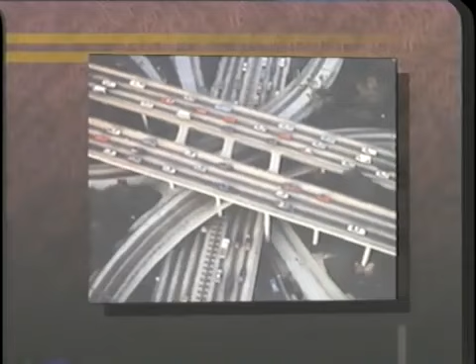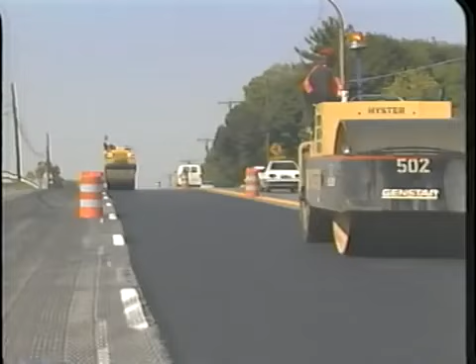For nearly a century, highway agencies and paving contractors have been constructing roads of hot mix asphalt, and with good reason. Asphalt pavements are smooth riding and long-lasting. Today, there's a new set of tools and techniques called the Superpave system that allows us to design even more durable asphalt pavements. Superpave, which stands for Superior Performing Asphalt Pavements, is the mix design system for the

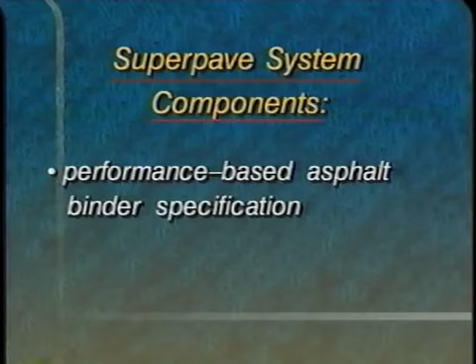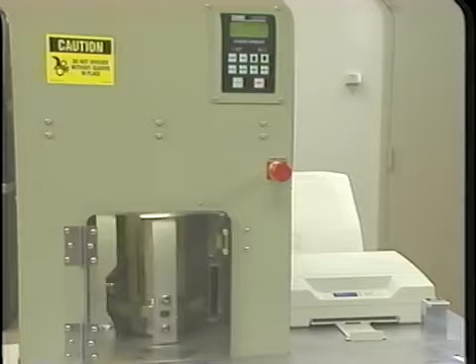next century. The Superpave system has two key components: performance-based asphalt binder specification and volumetric mix design and analysis. It also uses an improved method of laboratory compaction that reflects field conditions. Pavements take quite a beating. Not only are they subject to ever-increasing traffic loads and volumes, but they also must serve in a wide range

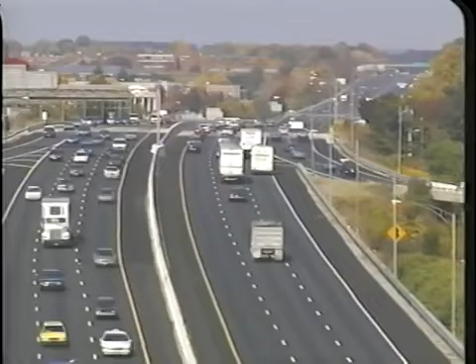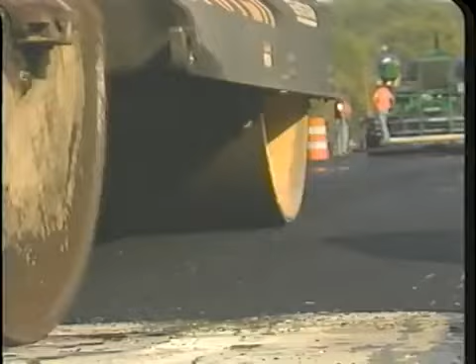of conditions. The Superpave system incorporates a new binder specification that classifies asphalt binders into performance grades based on a range of climates and pavement temperatures. The specification sets certain physical properties that all binders must meet, but the temperature at which those properties must be attained is determined by the specific climatic conditions at the paving location.

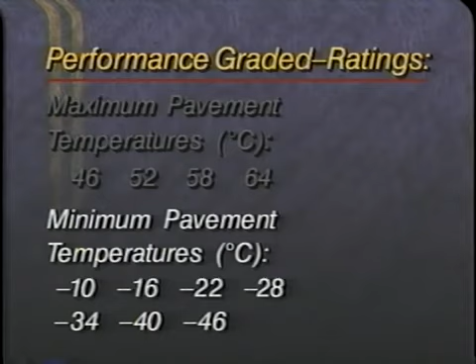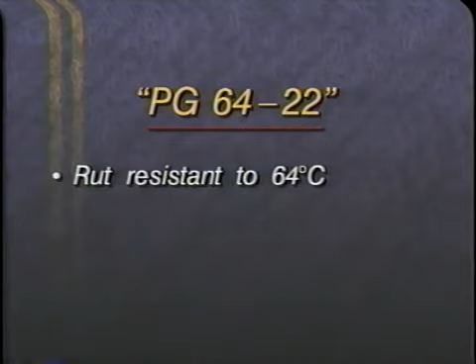Superpave binders are classified by PG for performance-graded ratings. The rating contains two numbers indicating high and low pavement temperatures. For example, a PG 64-22 binder used in a Superpave mix is expected to be resistant to cracks and ruts at pavement temperatures as high as 64 degrees Celsius and as low as -22 degrees Celsius.

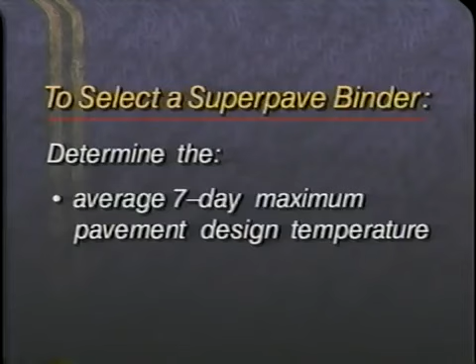To select a Superpave binder, you first determine the average 7-day maximum pavement temperature and the minimum pavement design temperature for a particular job site. To make this task easier, a weather database with more than 6,000 weather stations is included in the Superpave

system. For pavements in extreme climatic conditions, some asphalt cements may have to be modified, but modified or not, a PG binder will have the required properties to perform as expected during the pavement's life. This is what is meant by a performance-based specification.

Asphalt refiners and suppliers are converting to PG-rated binders. The conversions are being done on a regional basis in coordination with highway agencies' shift to the Superpave binder specification. Hot mix asphalt producers should be able to buy PG binder from the same supplier they currently use.

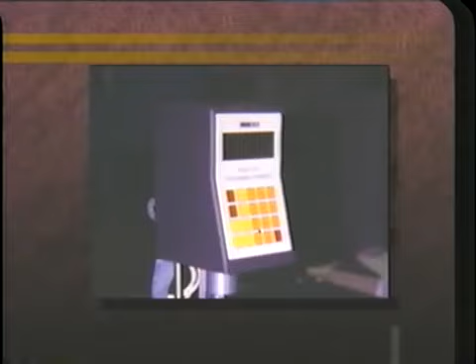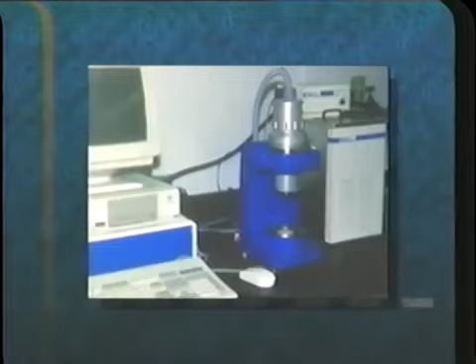Testing binders for conformance with the Superpave specification requires several new pieces of laboratory equipment, but the PG-rated binder requires no changes to standard methods of handling, storing, and transporting binders. Superpave mixes are based on volumetric properties.

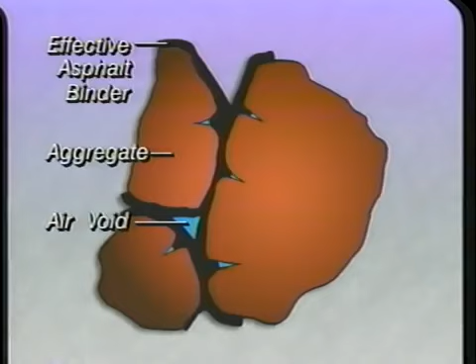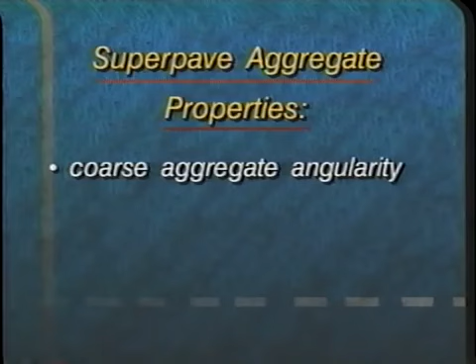The characteristics of the aggregate and the volumetric properties of the mix, such as air voids and voids in the mineral aggregate, form the basis for selecting aggregate gradation and asphalt binder content. The Superpave system bases aggregate selection on consensus properties that apply equally at all locations. They include coarse aggregate angularity, fine aggregate angularity, flat and elongated particles, and clay content.

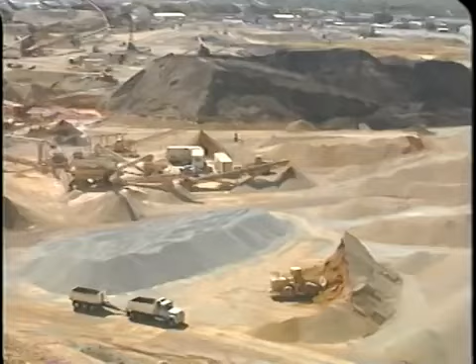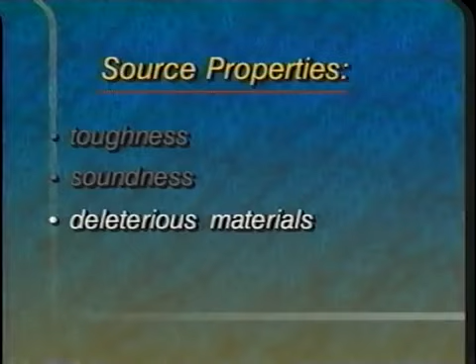In addition, each highway agency determines source properties in light of local or source conditions. Source properties include toughness, soundness, and deleterious materials. These tests for measuring aggregate properties are not new. Many highway agencies are already using the tests in conventional mix design. Switching to the Superpave system will therefore require little or no additional training in aggregate selection.

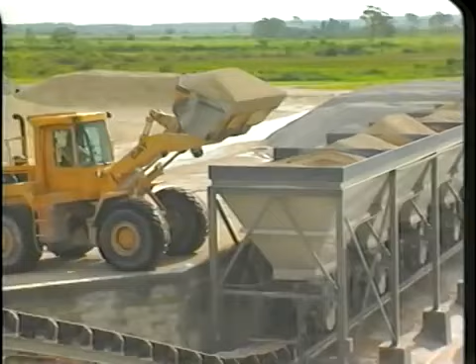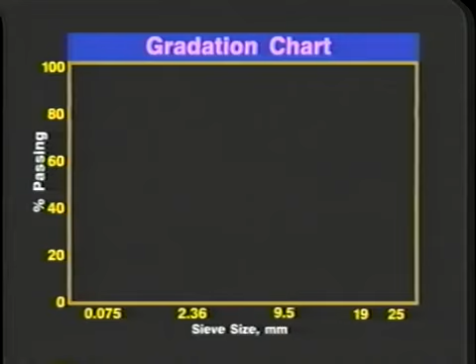To improve the properties of the asphalt mix and the performance of the pavement, the Superpave system provides a means for determining the optimum aggregate structure or gradation. The aggregate gradation process is a refinement of an approach already in use by many highway agencies. Gradations are defined using the Federal Highway Administration's 0.45 power chart.

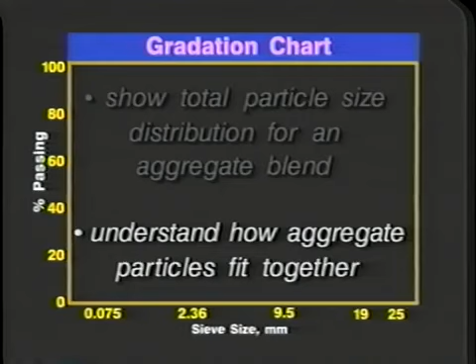The chart can be used to show total particle size distribution for an aggregate blend. The chart is also useful for understanding how aggregate particles fit together. The maximum density line is plotted from the origin through the maximum aggregate size.

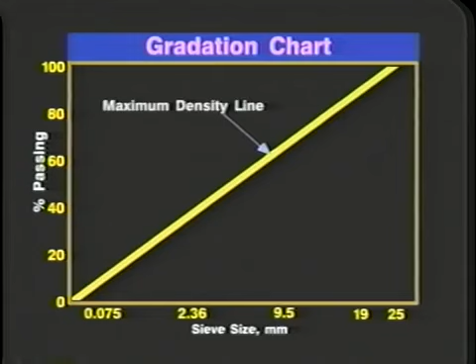The Superpave system adds two features to the 0.45 power chart, namely control points and a restricted zone. The control points serve as boundaries for the outer ranges of key sieves. Three sets of control points are plotted, one for the nominal maximum sieve, one for an intermediate sieve, and one for the smallest sieve. Aggregate gradations must stay within the control points.

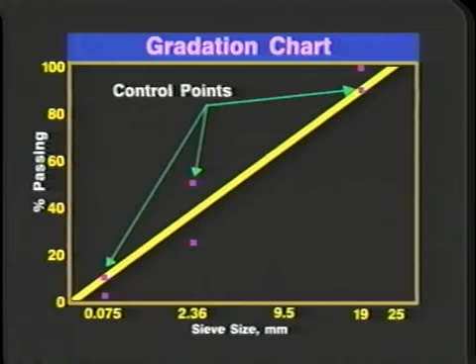The so-called restricted zone is actually a warning zone, providing a guideline for mix designers. Gradations falling in the restricted zone may have too much rounded natural sand. Mixes constructed using such gradations often experience compaction problems during construction and can be prone to rutting. For best results, mix designers should choose a gradation that falls between the control points and avoids the restricted zone.

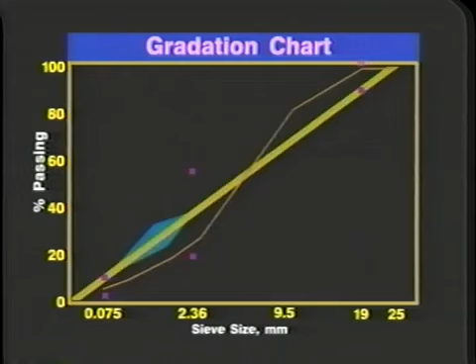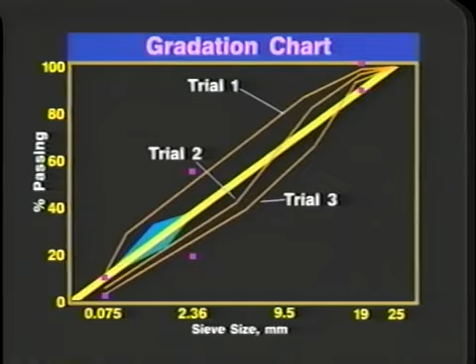The next step in designing a SuperPave mix is determining the optimum aggregate structure. The aggregate sources are evaluated to develop 3 or more trial blends that meet the gradation requirements. Aggregate properties for the blends are then calculated. The appropriate PG asphalt binder is then mixed with the aggregate, and the mix is aged in an oven to simulate the aging that occurs during the construction process.

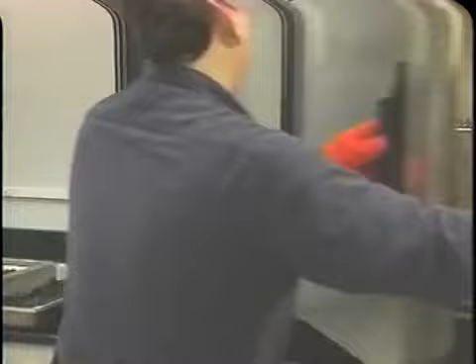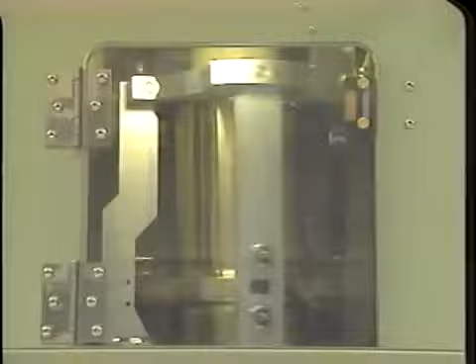The trial blends are evaluated by compacting the specimens and determining their volumetric properties. The SuperPave system uses a new method of laboratory compaction, the SuperPave Gyratory Compactor. The SuperPave Gyratory Compactor is quiet and easy to use. It more accurately reflects field compaction, and research has shown test results to be significantly more reproducible.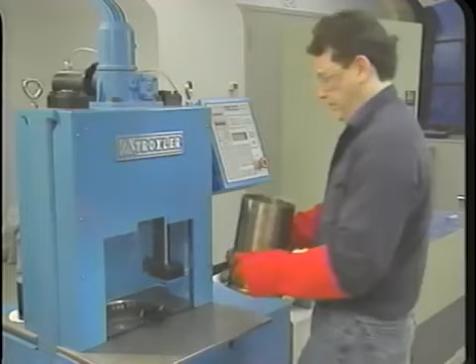The asphalt mixture is loaded into a mold 150 millimeters in diameter. A ram loading system maintains a constant pressure on the specimen. The mold is tilted at a slight angle and rotates while the load is being applied. The number of rotations or gyrations required for each specimen is dependent on the highest air temperature and the amount of traffic expected at the paving location.

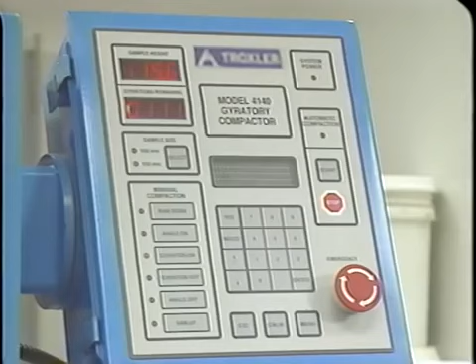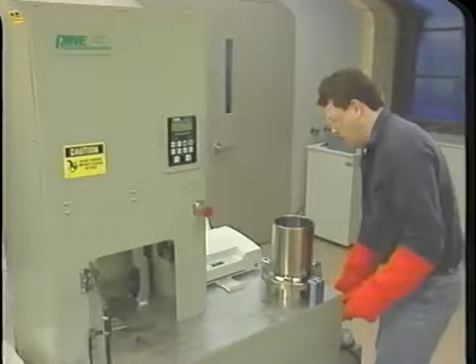During the compaction process, the height of the specimen is continually monitored, allowing the bulk-specific gravity of the specimen to be continuously calculated. Upon completion of compaction, the specimen is removed from the mold. The volumetric properties of the mixture are calculated, and the data are analyzed to determine which aggregate blend provides the optimum aggregate structure.

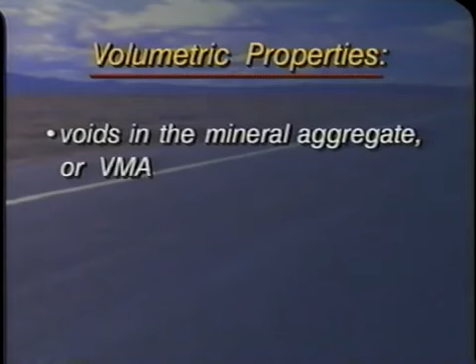Volumetric analysis is an integral part of most mix design procedures and is at the core of the SuperPave system. Extensive studies have shown that volumetric properties are directly related to performance. Volumetric properties include voids in the mineral aggregate, or VMA, voids filled with asphalt, or VFA, and air voids. Controlling the volumetric properties in the field will ensure that the pavement will perform as expected.

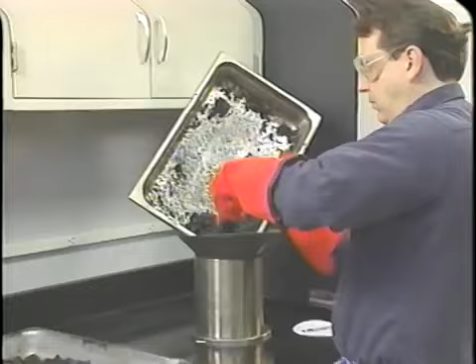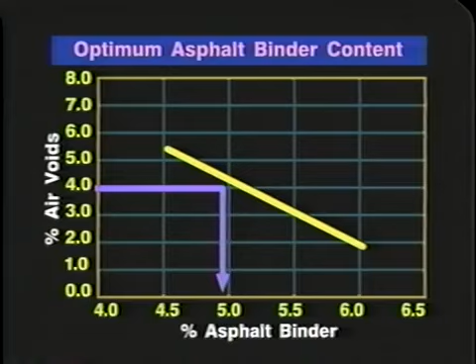The optimum asphalt binder content is then determined for the selected aggregate structure. Samples that have been prepared using different asphalt binder contents are compacted using the gyratory compactor, and volumetric properties are determined. The asphalt binder content that results in 4% air voids is then selected. The SuperPave Gyratory Compactor can also be used for quality assurance at the construction site by determining whether the plant-produced mix meets the SuperPave volumetric requirements.

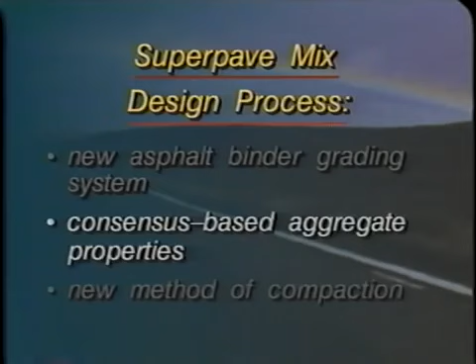As we've seen, the SuperPave volumetric mix design process involves a new asphalt binder grading system, consensus-based aggregate properties, and a new method of compaction. The mix design process consists of 3 main steps. Select the aggregates, binders, and possibly modifiers to be used in the mix. Select the design aggregate structure. Select the design asphalt binder content.

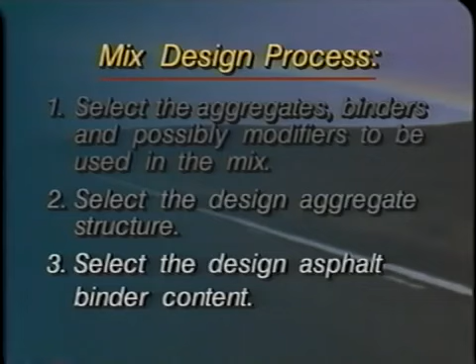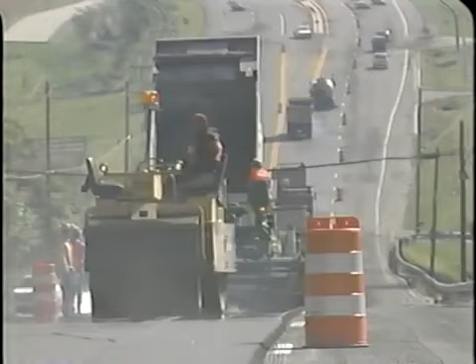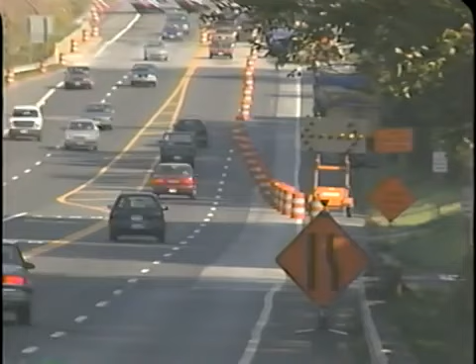Nationwide use of the SuperPave binder specification is expected by 1997. The Asphalt Technical Working Group, which provides guidance and direction to the nationwide SuperPave implementation program, has set a target date of 2000 for adoption of the SuperPave mix design procedures. The actual schedule of implementation is, however, up to each state highway agency. Many highway agencies are already designing and specifying SuperPave pavements.

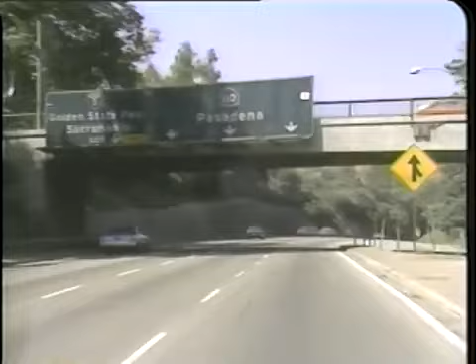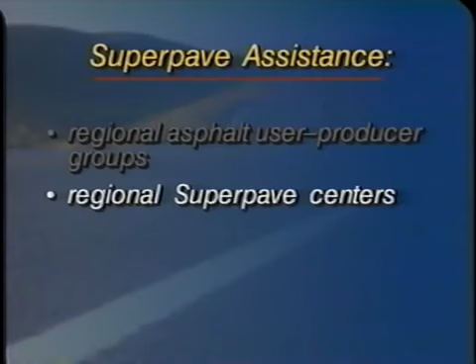The Federal Highway Administration is coordinating the transition to SuperPave as part of its overall program to implement the results of the Strategic Highway Research Program. It includes training and technical assistance in SuperPave binder selection and volumetric mix design procedures. Training and technical assistance are also available from a number of other organizations, including the Regional Asphalt User-Producer Groups, the Regional SuperPave Centers, state and local highway agencies, National Center for Asphalt Technology, industry associations, including the National Asphalt Pavement Association and the Asphalt Institute, and universities.

SuperPave is the next generation of hot mix asphalt pavement technology. It provides a new set of tools for designing smooth-riding, longer-lasting asphalt pavements. This advanced technology is ready to be put to use today. SuperPave, the mix design system for the next century.